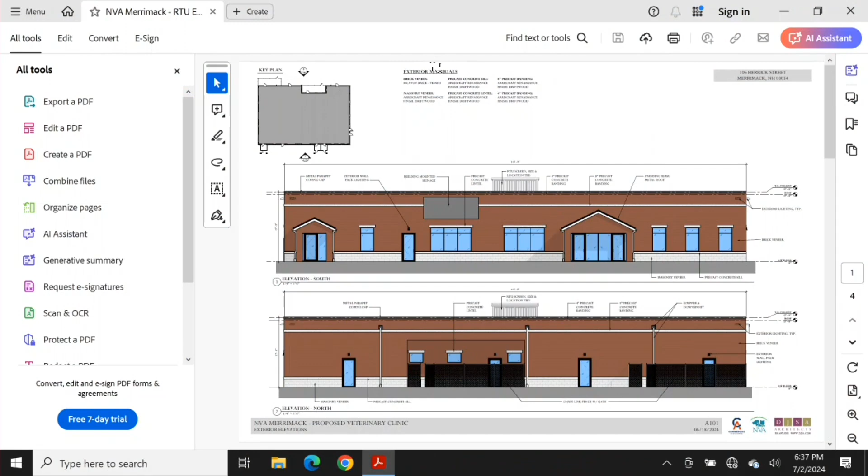One of the requests from the last meeting was to show elevations on all four sides of the building. I'll do full screen here. That's good enough. So here are the four elevations you can see.

Another request from the last meeting was to show a view from Daniel Webster Highway showing the equipment on the roof and the screening for that. So here is that view and the rendering showing that angle. We've also provided soundproofing details.

So those are the major changes for architectural.

As for traffic, we didn't revise anything from the first memo. There was one request to provide some context regarding the animal daycare aspect of traffic, since that's not in the technical traffic manual. So they performed a traffic count at the existing Merrimack Veterinary Hospital. Those counts were in line with what TEC had. We actually project lower traffic than that because we're going from overnight boarding to strictly animal daycare, so we predict the count will be around there, if not a little less.

So I'll pull up the civil plans now and show the other revisions that were made.

Excuse me, yes. You're going from overnight to daily, and you're going to have less traffic? Yes, they're getting rid of the overnight boarding service, so it's just during the day. So you're going to have animal daycare traffic in and out every day, as opposed to traffic coming in to drop off and then coming in a different day to pick up. That sounds like more traffic. Well, I can let them speak to that.

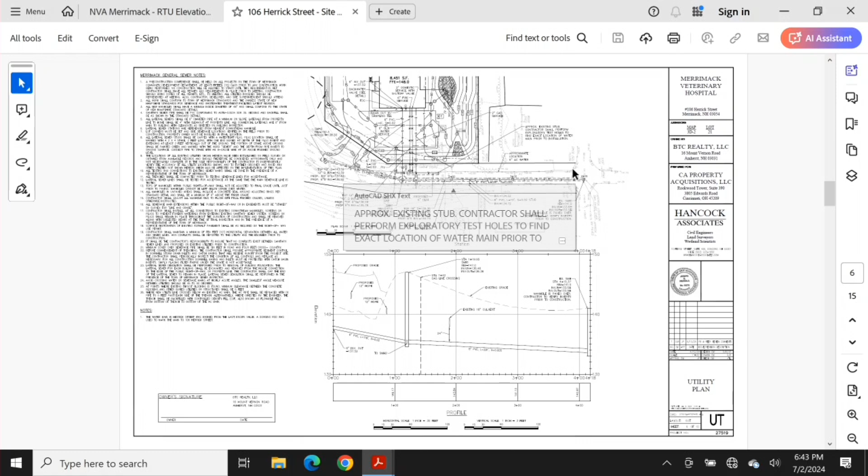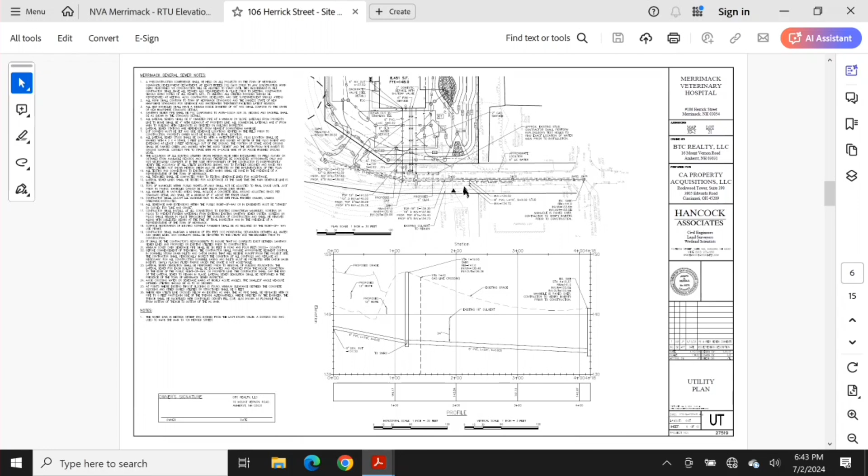For utilities, the sewer department had requested we extend the sewer main to the extreme edge of the property, so we've extended that line and added an additional manhole. They also wanted more information on the sewer manhole at the intersection of King Street and Herrick Street, so we got plans from them and updated our inverts based on those plans, but we'll still need confirmation in the field prior to installation to make sure those inverts are accurate and it was built according to the plans we were given. We've also added a sewer stub for the property across the street based on the sewer department comments, and added additional information on the existing gas line.

For the lighting plan, one of the changes was we added building lighting, so that is reflected on the photometric plan.

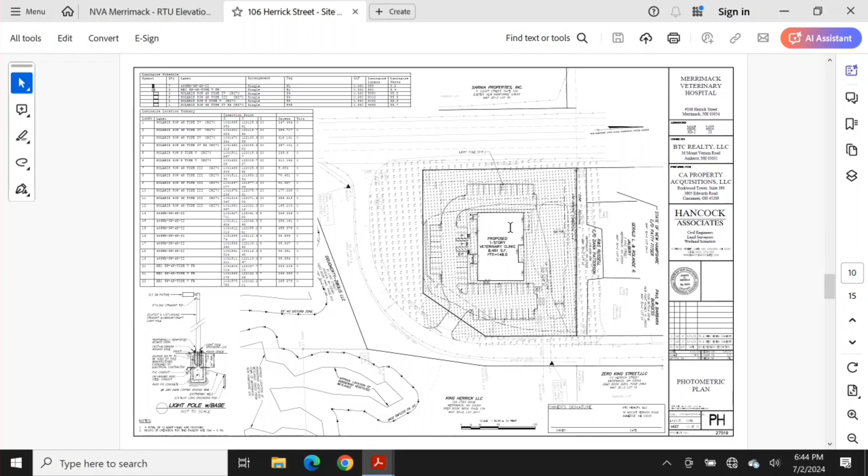We've also added the detail sheets. The detail sheet was added to include all the details and notes that were requested in the first review.

We've also added a fire truck maneuvering plan showing fire truck access around the building. We had our meeting with the captain as well, so he verified the truck size and all of that to his satisfaction.

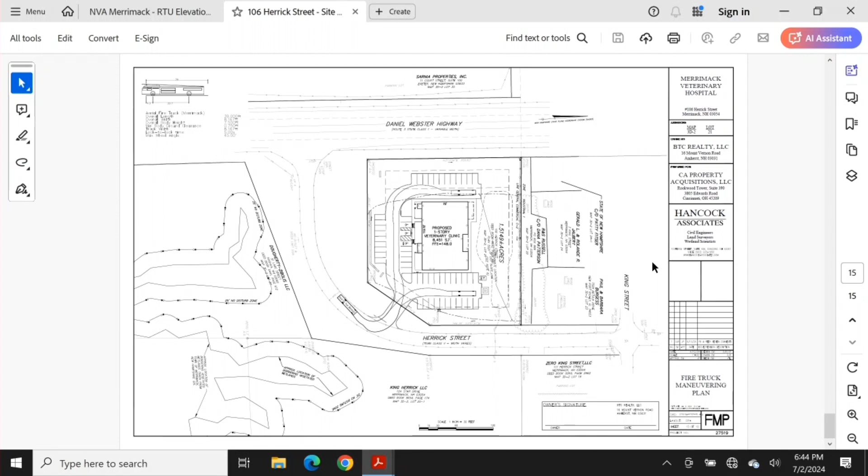Another thing I want to read verbatim is the letter we submitted requesting waivers to the architectural design of the building, based on this property being within the transitional district. We're requesting 2 waivers. Acting on behalf of CA Property Acquisitions LLC, we hereby request the following waivers.

Site Plan Regulations Section 312D33 for roofing, and the second waiver would be to Site Plan Regulations Section 312D35 for doorways. We now understand the project is in the transitional design district per Fuss and O'Neill's review comment stating the proposed site appears to be in the transitional design district. We note that this district only permits flat roofs on buildings of 2 or more stories. The applicant has also not provided a public entrance on each side of the building that faces an abutting street as required. The building facade does meet the requirements with vestibules in the front and the pet relief area alcove in the rear.

For the first waiver regarding roofing, as we presented at the initial public hearing, the project architect has designed a flat roof building. The planning board discussed at the first hearing the need for screening the mechanicals on the roof, but there was no discussion on introducing a pitched roof.

The regulations call for roofing to be pitched or hip roofed design with slopes having an average slope greater than or equal to 1 foot of vertical rise for every 3 feet of horizontal run, with overhanging eaves extending not less than 18 inches beyond the supporting walls. Varied roof planes, gabled windows, and other similar features are encouraged. Flat roofs are only permitted for buildings of 2 or more stories.

Yeah, but this is all centered inside of the building roof, right? None of it comes out to the edge and takes care of the edge of that wall. Certainly looks like it does. You're looking at a different picture than I am. If you look in the middle of the roof, you'll see the screening. They're not talking about coming up an extra 4 feet on the walls or the facade, just the center of it? Yeah, that's the only screening they're talking about putting in there. Let's see what we can do for pitching.

Okay, so you'd like to see the architect work on something in regard to the pitching of the roof? Something on, I think what Tom is talking about, and I agree, that just doing that little bit of screening where the mechanicals are doesn't really do anything to the aesthetics of the building. It's kind of ugly, as a matter of fact. It does hide the mechanicals, but that's all it does. It just says here's where all the mechanicals are on this big, flat, square, cornered roof. And a pitched roof is what we're asking for, because it's aesthetically much more pleasing to the eye. Just screening the mechanicals in that little square box doesn't help that.

I'll let Jory speak to this. Jory Zola, I think I'm supposed to introduce myself, right? Yeah, please. Jory Zola with CA Commercial. Turn your mic, there's a light up there. Oh, there you go, sorry about that. Jory Zola from CA Commercial Development. I'm a real estate developer on this particular project. Address is 8723 Winfield Lane, Cincinnati, Ohio, 45249.

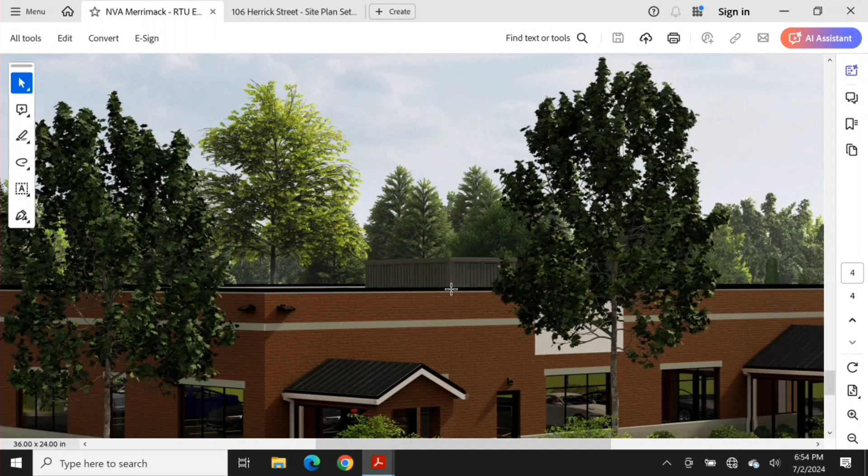I think that we can work with the town to try and create some visual aesthetics to help either pull up the walls to screen those mechanicals. I'm hesitant without the presence of a structural engineer to confirm that we can or cannot do anything concrete with respect to pitching. But generally speaking, we're agreeable to working with the town to either push the walls up, creating some architectural separation with pilasters or something of that sort to break up the features of the roof a bit. Even a partial pitched line that went up 8 feet or so and back, leaving the flat roof in the middle with everything hidden behind it.

Building again, something like that. Yeah, those are all things that we're open to doing. We want to make sure that we're adding to the community here, not detracting from it, and whatever we can do, we'll do. I just can't, without being a structural engineer, commit to anything concrete, but I can commit to working hand in hand with the town to come up with a solution that's viable and makes everybody happy.

Casey, can we approve the waiver subject to community development approving the change to the roof line? That is an option. I think a downside to that approach is typically we want conditions to be more objective and not subjective, so it would just be up to the comfort level of the planning board. If you want staff to have that authority to decide. I think staff understands what we've been saying. Okay, any other questions?

There will be a door on that side, you're looking at a door right here, but it's not got any of the dressing on it. I understand, but I think this conversation is with respect to the waiver itself. The waiver says all sides. This is one of three sides, and I just didn't want to give a blanket waiver that says you don't have to worry about it if we're not talking about this side.

We were speaking to pedestrian access a bit too, since there's no public sidewalks to this area. That was kind of built into the regulation as we read it. So that was another reason I thought it was a waiver request, for pedestrians from the street, from the parking lot. Pedestrians from the street - is that the bottom view, the one that faces DW Highway?

No, it says east. That's facing Herrick Street, on the opposite side of DW. Yeah, that's facing the south side of Herrick Street. Yep, and Herrick Street curves around it at that level, underneath.

So which one faces Herrick Street? This bottom one faces Herrick Street, and also the front elevation here faces the first portion of Herrick Street as you enter from Daniel Webster, the slope coming down DW. So this is Herrick Street, and then Herrick Street goes around. Well, two of them can't face Herrick Street. Yeah, they can, because they're on the corner. Oh, it wraps around. Okay, got it. Sorry.

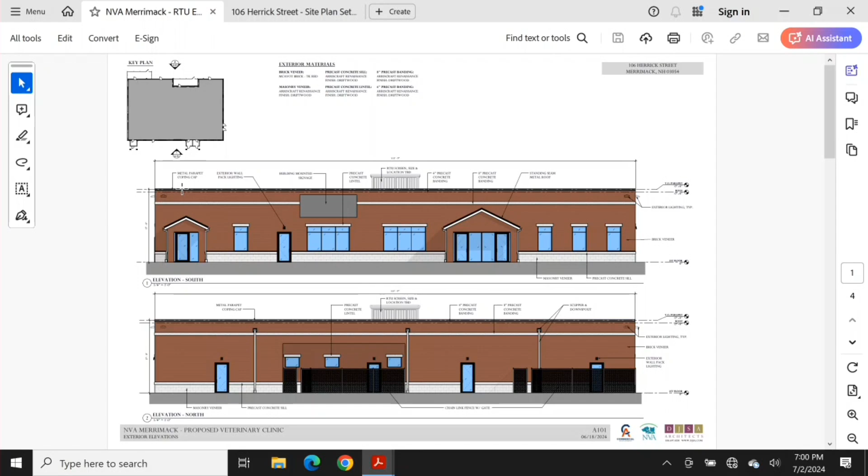So, board, how do we feel about this? Like I said, I don't have a problem with the west view from DW Highway. But I don't want to just give a blanket waiver and forget about the east view, because that's visible from the street. It's got most of the parking on that side, or at least a fair amount of it. And it's not a public entrance, I'm guessing, which makes it a problem. But it could be dressed up to be more aesthetically nice. If you have suggestions, again.

There actually is no door on the east side, correct? Well, there's no public door. I don't see any door. These are doors. Are they doors? They better be, they go to the ground. Those access, those emergency exits, or there's access - exterior wall pack lighting above them, it's doors. Okay, referencing back, those right there, those are doors, correct? Yeah, yes.

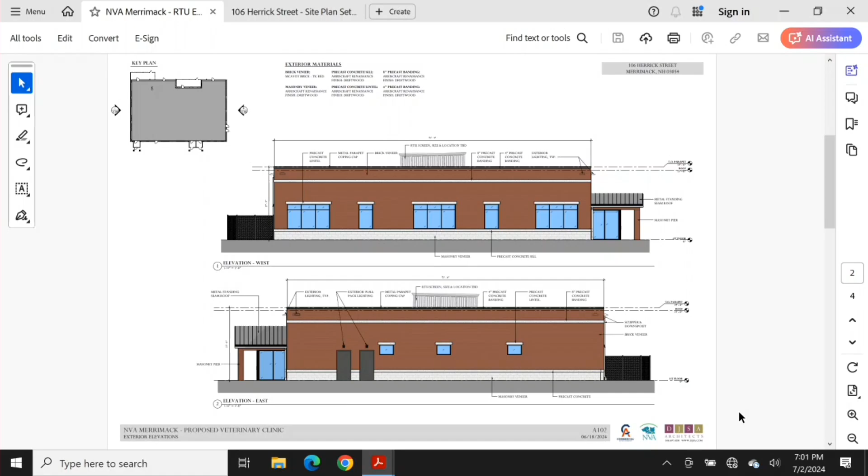One of those doors is an employee entrance, the other is out from an exam room. The reason there's no windows on that door is it's a euthanasia exam room, and ultimately you want that client to have privacy. I just think the wall looks very industrial. And on that side you have X-ray, just things that maybe can't have windows.

Per se, I get it. We used to have a member who was very much into the artistic flavor of this, and she would want to see broken up walls or some other kind of thing to try and make it not look so bland. I think that's fair and a reasonable ask.

We are happy to break it up. We can bring the wainscoting up a little bit. We can break it up with some pilasters. That's not an issue.

I've been thinking about it, and I think the cleanest way to address this, if this is the board's wish, is to grant the waivers, but then when you conditionally approve the project, tag on those conditions, so that the conditions are actually on the notice of decision. Does that make sense? Okay, and then just be very clear on what those conditions are, and that will give guidance to staff later.

We can do that. That's all the comments I had. Those are good comments. Are we ready to vote on the waivers?

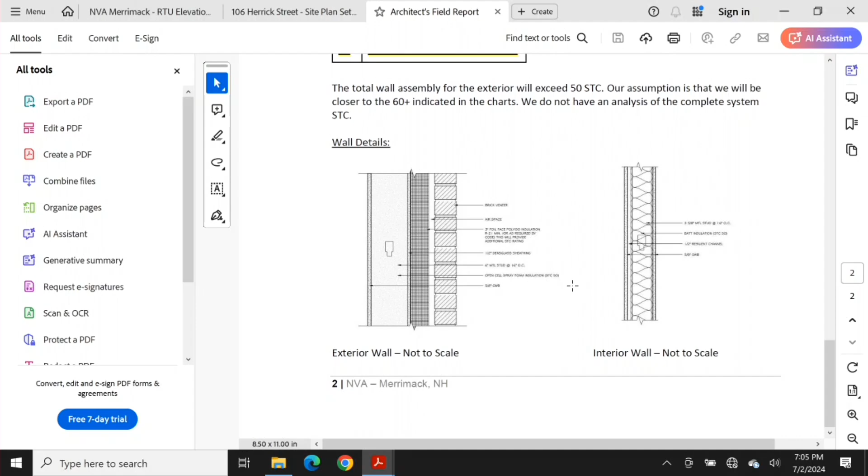Is there an outside area for the dogs to exercise? Yeah, there's a small outdoor pet relief area, but we are keeping them confined inside for the majority of the day to offset weather challenges. Right now we have an outdoor area and they're outside 75% of the year and they do okay, with no major sound disturbances even with clients coming in and us dealing with sick pets. But we're moving to all indoor, so hopefully that cuts down even more, because they'll just be outside to go to the bathroom and come right back - it's a very small pet relief area, in hopes we can get 365 days use of it as opposed to our limited use right now. Okay, understood, thank you.

Thank you. Any other comments?

I have to admit, not having been here for the previous presentation, I have no idea what is open for discussion at this point, or if the board is happy with it. Essentially, I don't have a problem with the veterinary hospital being there, with the conditions that have been put in here.

All right, board, so we now need to vote on accepting the application. Mind you, it's conditional approval, but also mind you, the conditions that you discussed. So is this final approval? Conditional final approval. Let me get the wording here. So is there a motion?